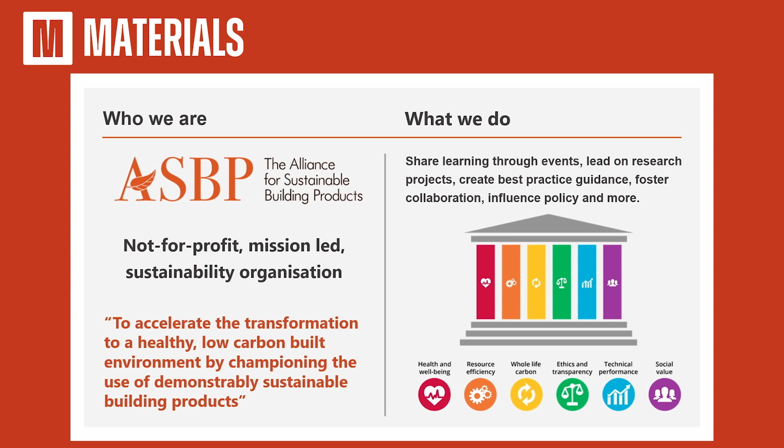So who are we? The Alliance for Sustainable Building Products. We've been around for, I think, 13, 14 years now. Our stand is over there if you want to come and say hello to us after the event. We're a not-for-profit, mission-led sustainability organisation, and we work around all these different areas. So today, very much, we're in the resource efficiency area, but that also touches upon lots of other areas as well. Reuse in terms of whole life carbon, ethics, transparency, making sure that we know what we're using is suitable. And we're very much about the products, and we're here to accelerate and really do more in terms of a healthy, low carbon built environment.

This is us in numbers. There's loads of info on our website, so if you haven't ever been on our website, do go and have a look. Lots of that available for free. We have toolkits looking at steel reuse, looking at reducing plastic packaging on construction sites. We have work on mass timber insurance, which is looking more at insurance related to fire and water damage of timber. So there's quite a breadth of what we do. We also have a lot of information on natural fibre insulation. All the manufacturers of that are members.

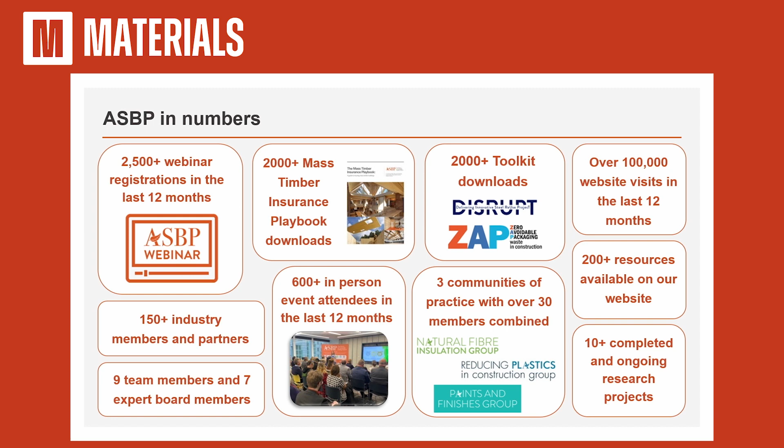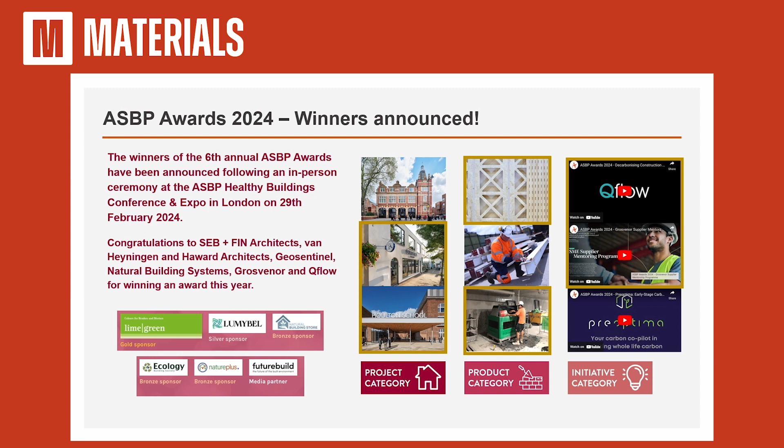Lots of webinars, and we had our Healthy Buildings event last week. This is our annual event, with probably about 170 people attending in the Building Centre. And at that, we announced our awards. This is our 6th year of our awards. And behind me, if you want to have a look, you can see all the finalists and the award winners there. So we had categories for project, product, and initiative. So go and have a look. Some really great projects, initiatives there.

We do run a lot of events on different topics. We're very much a knowledge-sharing organisation, so you can see some of the upcoming events there. If any of you happen to be near Wolverhampton or the West Midlands on the 13th of March, do come along, because we're having an in-person event, really picking up some of the stuff that we're going to talk about today, looking at how we work with the demolition industry to get much higher levels of reuse for different materials.

We have a memorial webinar from Neil May, who sadly passed away a few years ago. This issue is so important, mould, damp and health inequalities, so do come along for that. That's online if you can. And then we're looking at doing a few events related to biogenic carbon and circularity. It may need a snappier title than that, but that's how they're looked at in terms of the life cycle assessment standards.

And do come along, get involved with us. We're a friendly bunch. We're always doing lots of interesting things with lots of our members, of the about 150 members. Some of that's research, our specialist working groups in paints, plastics, insulation, lots of free stuff as well.

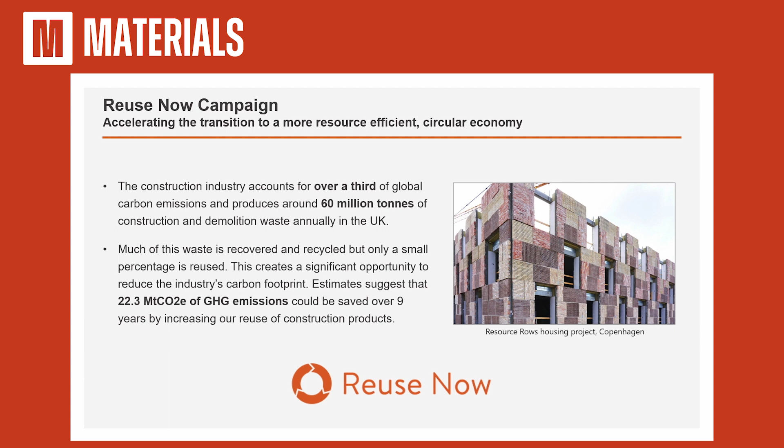Just one example of a case study here, you're perhaps already aware of the Resource Rows housing project in Copenhagen, where they innovatively didn't look at using bricks individually, but actually cut brick panels from the nearby Carlsberg Brewery building.

A bit more stats here from the Ellen MacArthur Foundation publication, looking at 3 main circular economy strategies that directly address emissions: making better use of existing buildings, designing new buildings better, but particularly from today's agenda perspective, reusing and recycling building materials so they don't end up in landfill or incineration.

And again, a few more stats. These strategies could reduce global CO2 emissions by 2.1 billion tonnes by 2050, making circular strategies vital to reaching net zero.

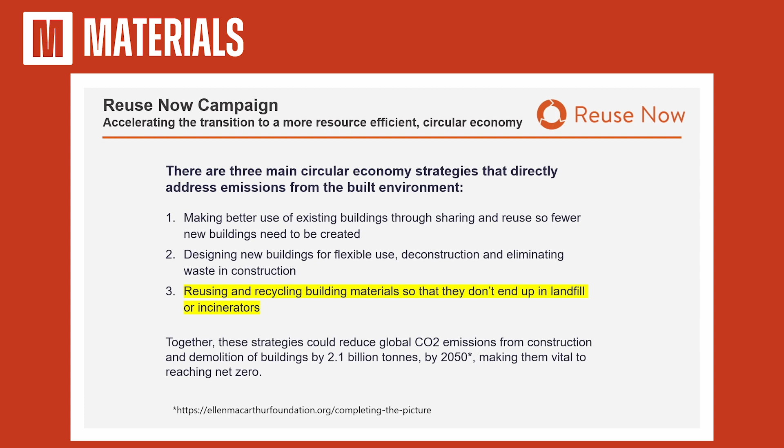Good waste hierarchy, inverted pyramid there, again something I'm sure you're probably already aware of. Looking again at that middle piece, building clever, reusing materials, designing for deconstruction and reuse.

Overall, circular economy and reuse strategies, as we've mentioned, reduce carbon emissions, maximise resources, addressing resource scarcity issues, which potentially are going to become more prevalent into the future. Limiting the impact of price volatility, not always, but quite often bringing cost savings, and increasing resilience by keeping those materials within the UK or within your local region. It's increasing resilience in the supply chain.

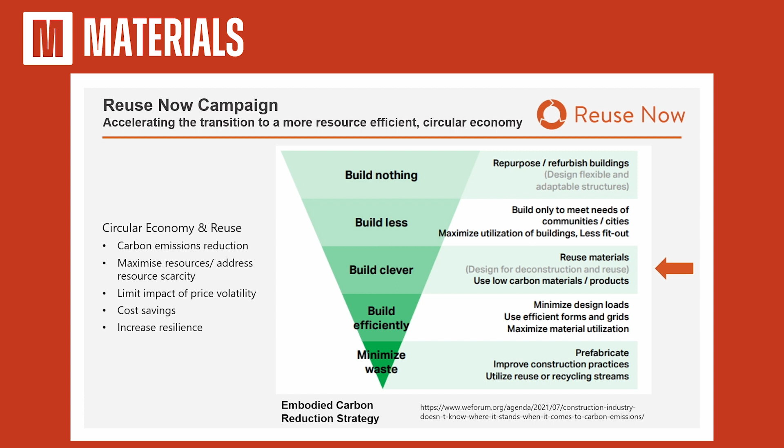Looking particularly at the Reuse Now campaign, which was relaunched in October last year with our Reuse Summit, which we'll look at doing again in October this year. We aim to encourage the greater reuse of building materials within the construction industry and accelerate the transition towards a more resource-efficient, low-carbon circular economy, as well as encouraging growth of low-zero carbon industries and supply chain models.

A nice long mission statement there. But really, within what we're doing with the ASBP campaign is being as practical as possible. We're very keen on knowledge sharing throughout the industry, and not just avoiding reinventing the wheel, to look at what others are already doing.

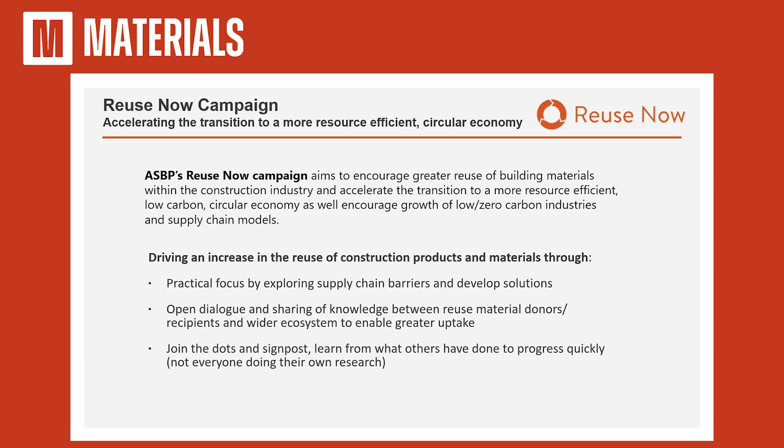There's lots of already good work happening around circular economy and reuse, so gathering that information, signposting to it, and there's lots of information, as Catherine mentioned, on the website, lots of different links, but then also looking at what everybody else is doing and seeing what gaps there are that we as ASBP can work with both of our members and the wider construction industry to plug.

So particular areas, in addition to events and what we've got on the website, looking at case studies, blogging on particular areas that we have knowledge of, or working with others to get their expertise across, doing some stakeholder mapping, but also doing some deep dives.

We've done quite a bit of research around different product and sector areas that the industry is interested in finding out more about. One of them we're starting to look at the moment is partitions within a building.

Another one is the industrial sector, because a lot of the case studies that we're coming across around reclamation and reuse of products tends to be in the commercial sector. So looking at the industrial sector, particularly in driving forward any best practice that's happening there and supporting the industry to do more.

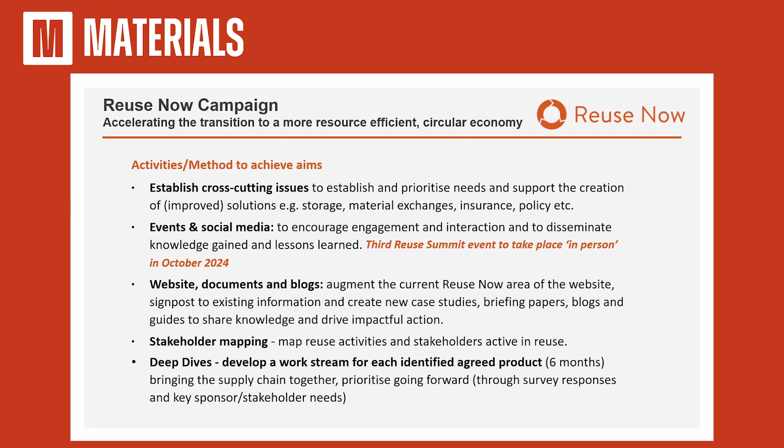And then also potentially, one of Catherine's favourites is doors. Not even particularly issues around fire doors, but just doors in general, and looking at what we can do to support the industry in reusing those.

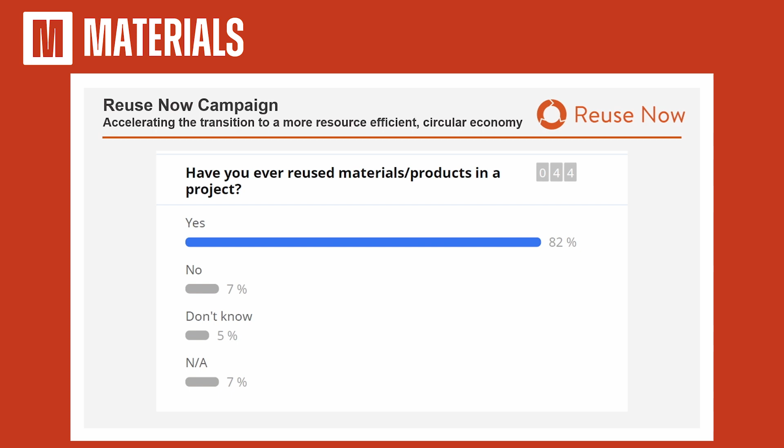Just a couple of stats that came out of our Reuse Now campaign. We did a few Slido questions at the event, and kind of as you'd expect, we are preaching to the converted slightly with the people that attend our events, but a good 82% of the audience had reused materials and products, and we then asked them to list the different types of products that they had reused.

As you'd expect, a lot of steel in there, some bricks, flooring, ceilings, paving, but also interestingly some MEP, which is another area that we're potentially going to look at moving forward.

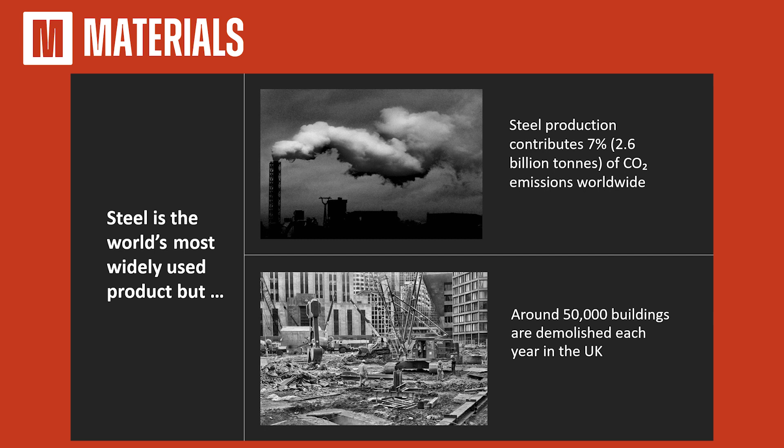Structural steel sections, so beams and columns, these are robust elements, and their properties don't deteriorate over time unless exposed to severe conditions like fire, earthquakes, or excessive dynamic loads. But generally, structural steel sections can be reused - they can be recovered from buildings and used within new buildings.

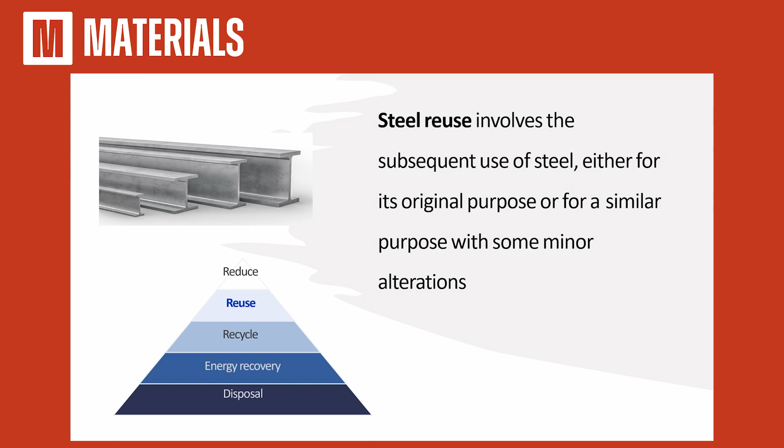Reuse is subsequent use of steel with some minor alterations, so reuse is different from recycling. Recycling is when steel is remelted, and remelting is a high energy process with lots of carbon emissions - reuse avoids that. Reuse provides up to 96% of embodied carbon savings, and that's why we see lots of interest from companies, with some construction projects using reclaimed steel, reused steel, because of this huge carbon saving.

Now, if well managed, steel reuse on projects can provide cost savings. There are lots of nuances to this, because recovered steel from buildings can be purchased at 20% lower price than new steel. But there are some additional processes of certification, testing, maybe some additional time for design, building, and fabricating. But we see lots of construction projects that are cost neutral, so there's no additional cost for reusing steel, and some even provide cost savings.

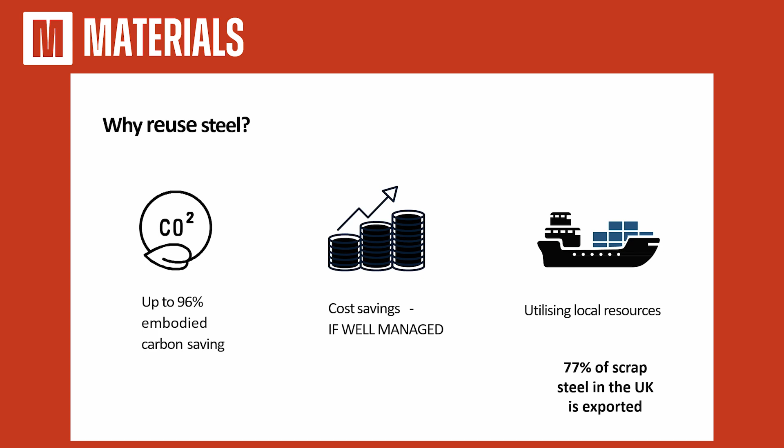And very importantly, reusing steel allows utilizing a local resource - steel that is available from buildings here in the UK. 77% of scrap steel is exported from the UK and recycled somewhere else overseas, so it's quite a long journey - Egypt, Turkey, Bangladesh, and some other countries. It doesn't travel nearby, so there's lots of carbon emissions. So there are socio-economic benefits of reusing steel - it's generating employment and using a local resource.

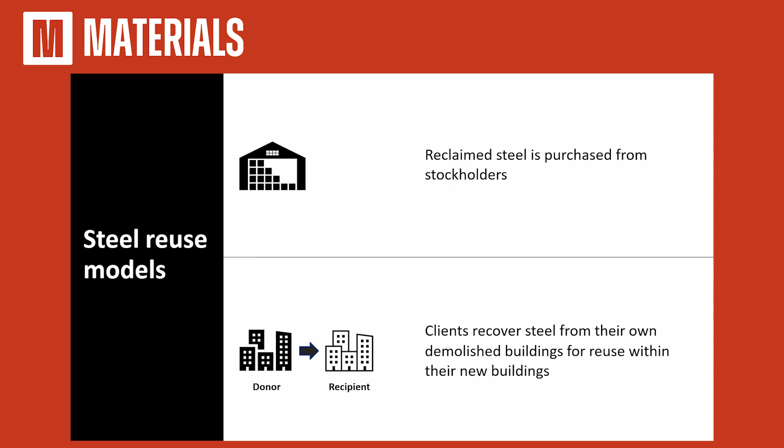So currently we see there are two major steel reuse models. Steel is purchased from steel stockholders who would previously have purchased it from demolition companies, and then it's sold on the open market. And there's another model where developers recover steel from their own buildings and then reuse it within their new developments.

So after the steel sections are recovered from buildings, the initial reconditioning takes place. This involves removing all the paints and coatings, because these cannot be used in the new life - they need to go so new coatings can be applied. It can also involve filling up holes, removing attachments, and similar processes.

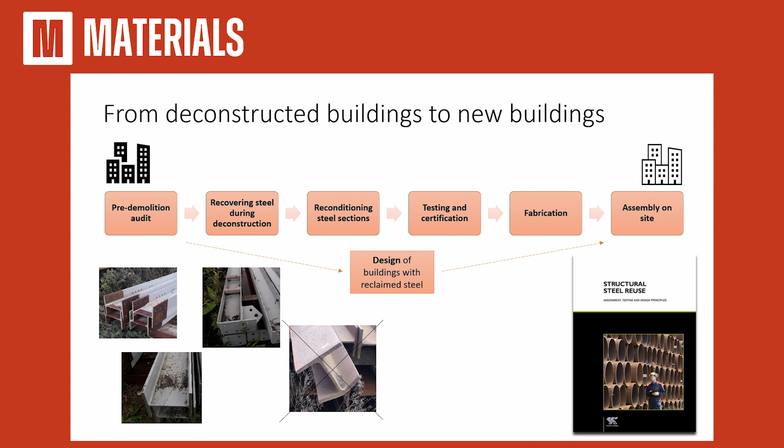And the technical barriers have been overcome for steel reuse, with the introduction of this structural steel reuse protocol by SCI. So there's no technical reason for steel sections not to be reused.

We looked at the lessons learned, what went well, what didn't go well, and the motivations for steel reuse - the huge carbon benefits of reusing steel is a big driver. Please have a look, these case studies are all available on our website. Bear in mind that project, Disrupt 1, was completed a year ago.

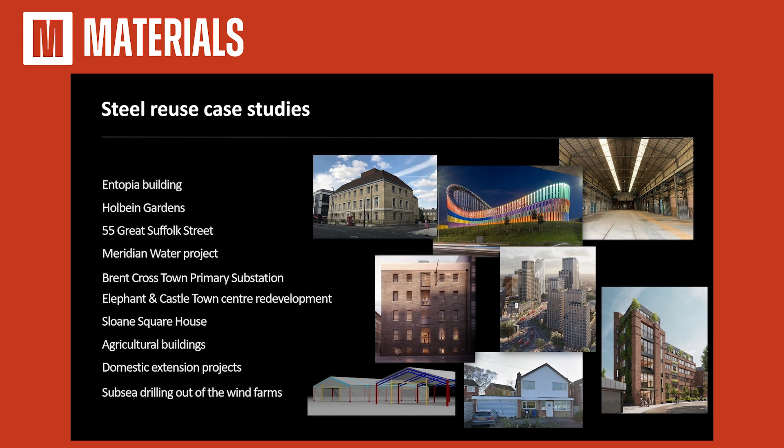So we have even more projects with steel reuse now in London, and these are some more findings from our project. Within this project we conducted interviews with the entire supply chain stakeholders - demolition contractors, stockholders, designers, clients - and identified the main technical, supply chain, economic, and other carbon considerations. All of these findings are available on our website.

There is a QR code, you can have a look, but there are lots of findings. We also mapped the supply chains - who is responsible for what, and what are the linkages. We also developed estimates of the amounts of steel that is currently reused and that can be reused in future. So there are lots of resources.

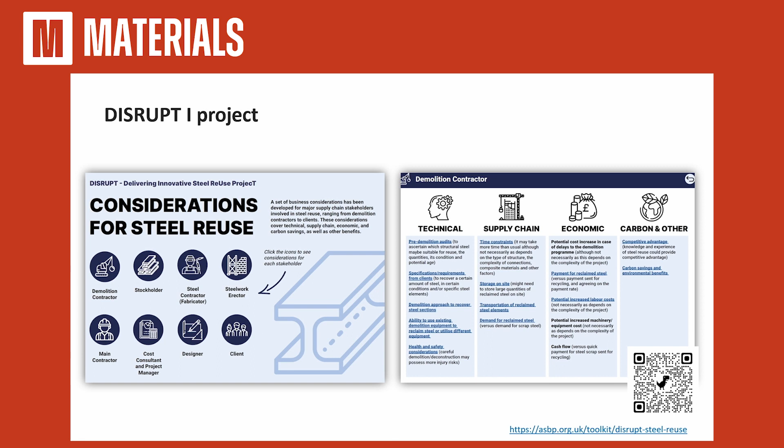Within this Disrupt One project, the main barrier for reusing steel is that there's lots of demand for recovered steel, which is great, but there's not enough supply. So basically, we need to recover more steel from buildings, and that's what we're doing now within this new project.

It's called Disrupt 2 - it's a deep dive with the demolition industry. We're trying to encourage demolition contractors to send more steel for reuse rather than recycling. We are funded by Innovate UK, so all the findings will be publicly available. We're co-partnering with the Institute of Demolition Engineers and Cleveland Steel and Tubes.

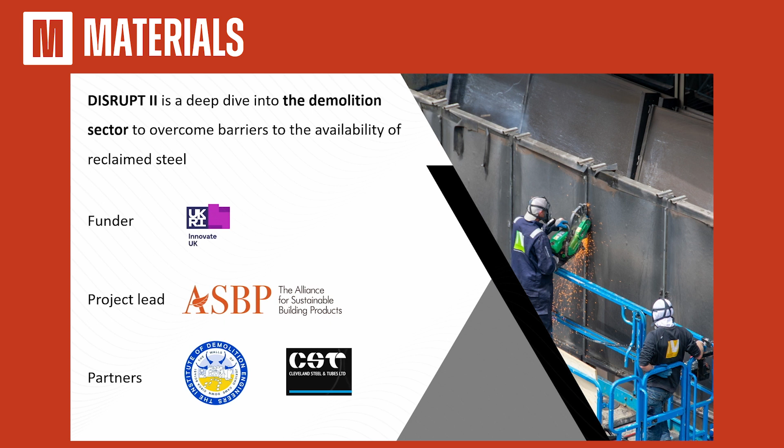So this project is a deep dive with the demolition industry. We conducted interviews with demolition contractors, and now we've formed a working group of 10 to 12 people, discussing in detail the technical considerations - the deconstruction and demolition approaches, how to recover steel from buildings in a way that's acceptable for reuse, along with supply chain, logistical factors, and economic considerations.

As part of this project, we are also looking at contractual relationships. Demolition contractors have contracts with main contractors or clients, and we're examining how this could be changed to encourage more reuse.

So far I have been talking about reuse of structural steel sections, but what about non-structural steel products? Fire doors, staircases, gates, fencing, all sorts of steel products that become available from demolition projects. Within this project we are looking at whether it's feasible to reuse them, what the barriers are, and how to encourage more of that.

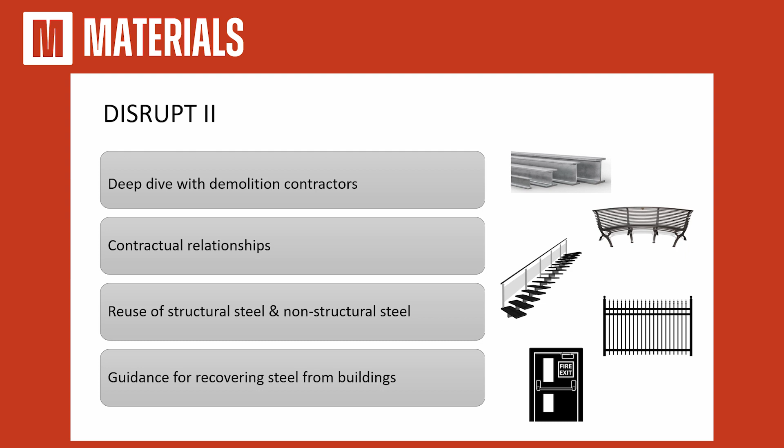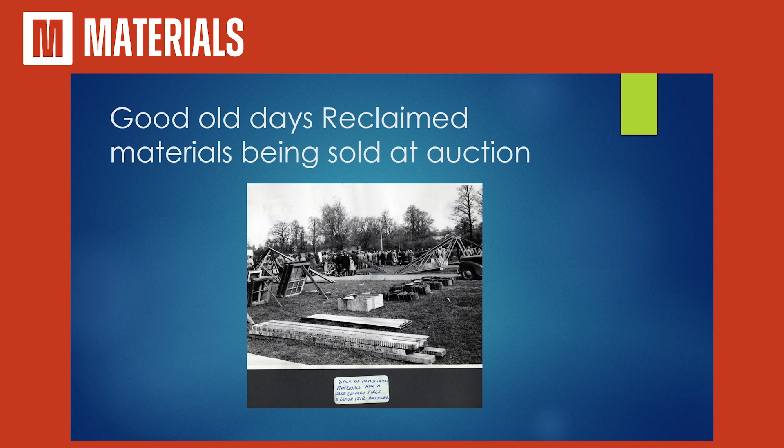But we do have, and we still have, difficult demolition waste, which is the main issue of my topic. This is a little photo here of how some of the timber used to be reclaimed. When I first started in the industry, 8 or 9 years old, my grandfather used to take me down to the yard, and we had to de-nail all of this timber so it could be sawn up. And it wasn't just modern nails, it was clout nails, where they used to use lath partitioning. Hundreds and hundreds of nails.

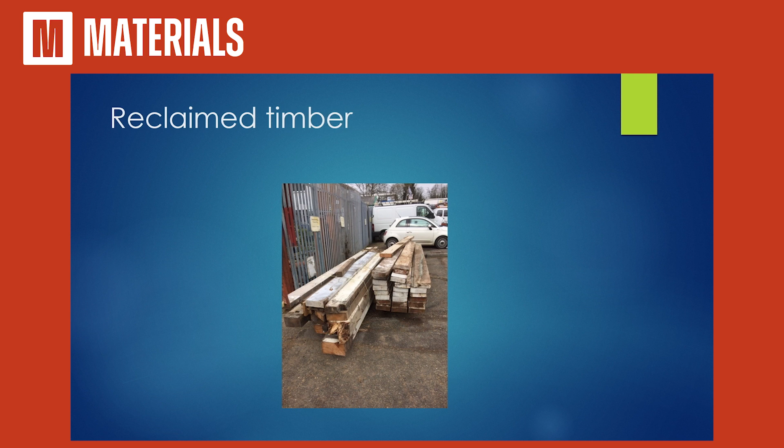We even used to recycle the nails, much to the disgust of the scrap man, because it used to give them punctures, but we used to put the nails into empty paint cans, seal them up, chuck them in the scrap. This is the timber, not some of mine, I must be honest with you, that's been de-nailed and then sawn to section sizes, predominantly planks for reuse in heritage reconstruction, etc.

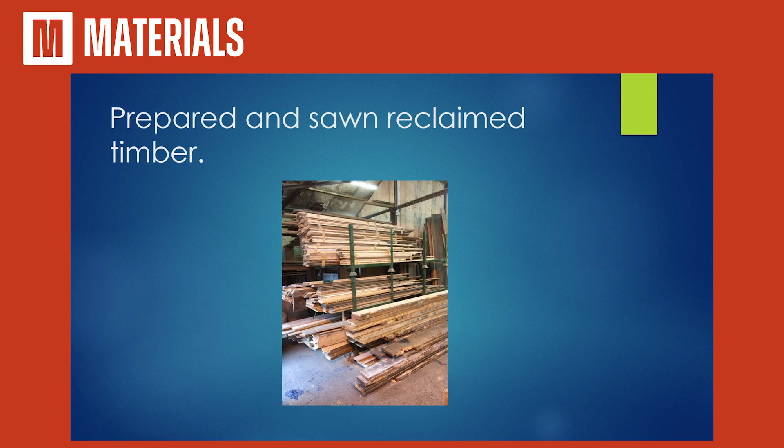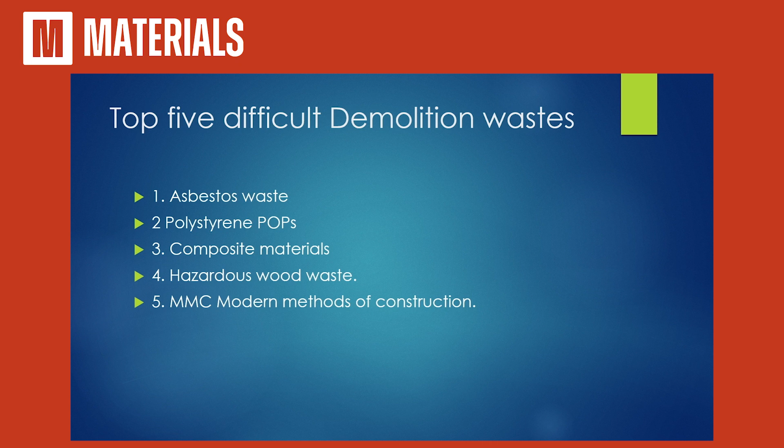So, our top 5 difficult demolition wastes. I've got asbestos waste, polystyrene and POPs, composite materials, hazardous wood waste, and then the last one is modern methods of construction. Asbestos, we've all known, has been a dangerous material. It was a brilliant material when it was first developed and imported into the country. Thousands and thousands of tons were brought into the UK because it was the best insulation material. Sadly, nobody thought to look at the side effects of asbestos. And asbestos is still one of the biggest killers in the construction industry.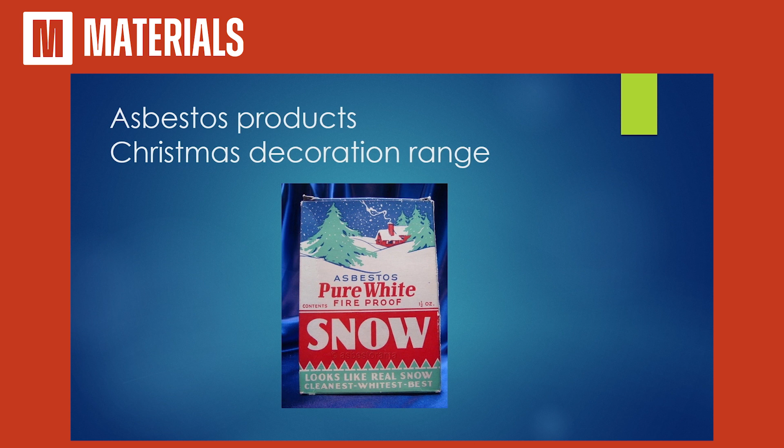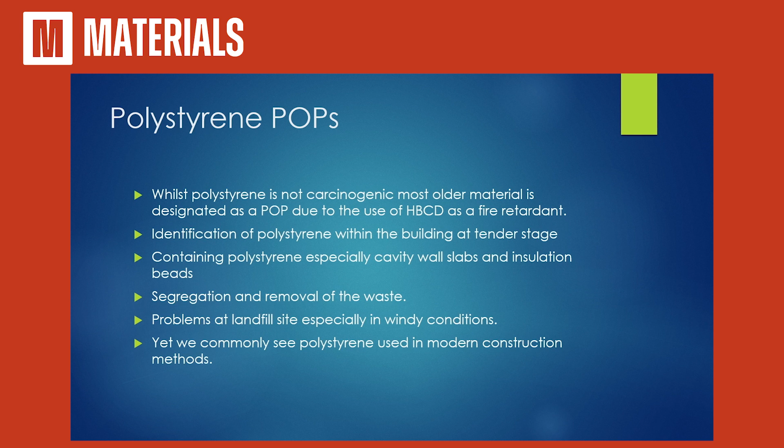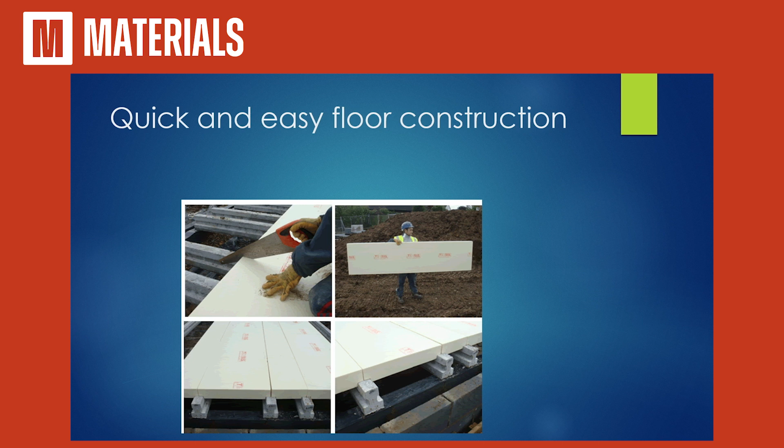So, next one is polystyrene and POPs. Whilst polystyrene is not carcinogenic, it is a real problem to our industry. It's in an awful lot of construction projects now. Sadly, I've had a wander around this morning and I've seen quite a few stands that are showing polystyrene blocks. I don't want to slag them off too much, but they're not really the best thing for our industry. The pre-insulated blocks here and the quick floor construction may be all well and good, but this is what happens when we try and get it out from a demolition project.

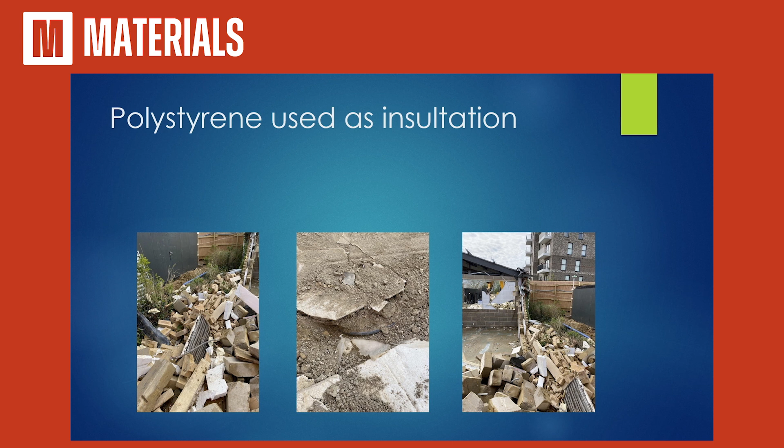Can you imagine insulation in a cavity wall? The machine driver comes along with his machine, knocks it all down, and there's polystyrene everywhere. This particular project, they picked the large pieces out by hand, but the smaller pieces they had to vacuum up with landscaping garden vacs. And that's quite common now. Even when it's vacuumed up and disposed of in the skip, there's nowhere that's recycling it in this state. Once it's in the rubble, it's contaminating the rubble. It can be taken out by flotation, but that is a little bit of a difficult process.

So we have pre-insulated plasterboard blocks as well. Some of the plasterboard has got phenolic foam backing. That is quite an issue. Plasterboard itself is regarded as a special waste. It has to be segregated. It has to go in a single non-reactive cell because of the hydrogen sulfide, the smelly rotten eggs gas it gives off, which is quite unpleasant. The Americans were the first to ban it, but it's now banned from landfill in the UK unless it is in a single cell, properly managed.

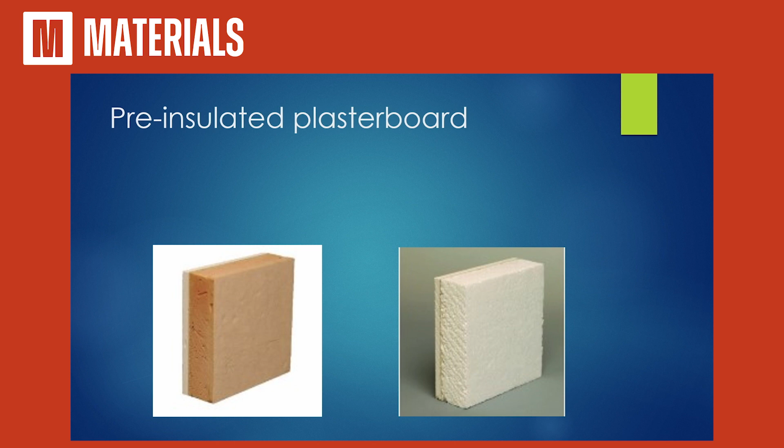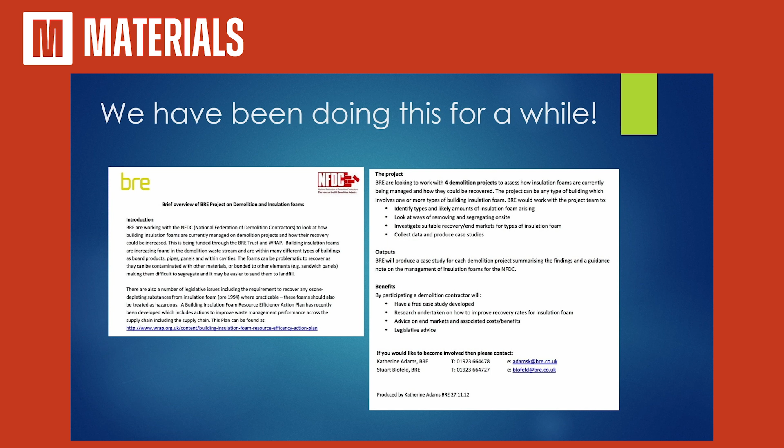But we have been looking at this polystyrene for quite a while. Katherine had one of these things pop up on Facebook. What's this, 11 years ago, wasn't it, Katherine, we first looked at this? The BRE actually had a building on the BRE campus that was constructed from polystyrene blocks with concrete poured in the middle. They had to scrape the polystyrene off by hand to get it away. And I'm not sure if there's still a stockpile there, but it's gone finally. So that's one I've never forgotten.

Composite materials. The use of composite materials is growing all of the time. Whilst we can manage those, and they are very good for what they're meant for, they give a beautiful finish to a product, but they are very difficult at the end of life. It's far simpler, say for a roof structure, rather than using a moulded panel. Some of these big sheds currently use a composite panel which has got a lining of steel sheets, phenolic foam, and then the outer layer for the roof, all stuck together.

The way they take those apart, they take the sheets off. They have to stand a machine on one end of it and peel the sheets apart to scrape off the polystyrene foam. There's nowhere other than fridge recycling waste that would take those sheets as a single product. They're not reusable. I've yet to find anybody that will take them as reuse.

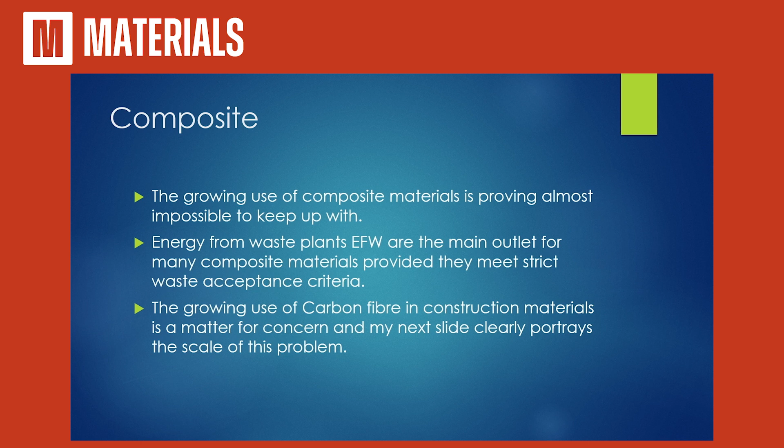Even back in the good old days when I was taking stuff for auction, the farmers wouldn't buy them because they sweated in the cow sheds and they used to drip water onto the cattle. They much preferred, believe it or not, asbestos sheets. But that market disappeared, unfortunately.

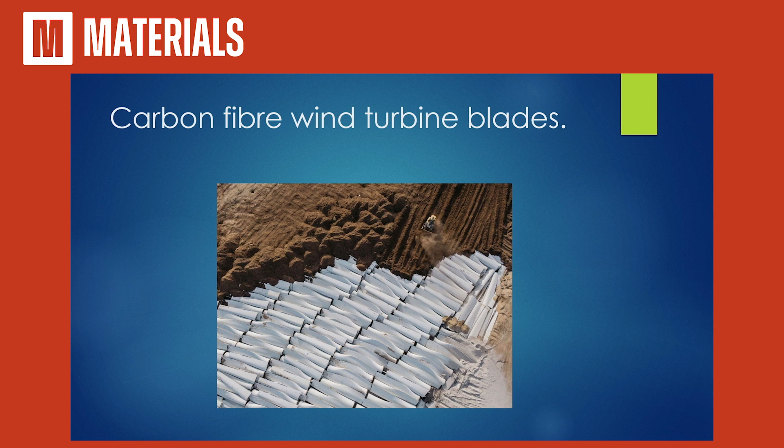Hazardous wood waste. The Environment Agency changed the position statement in 2023, and wood waste is declared as hazardous unless tested to prove otherwise. This is due to the various chemicals that they've used in the wood treatment to prevent fungal issues, damp issues, and as a fire retardant. So the hazardous wood waste now has to be taken for testing. If your test proves that it is hazardous, it has to go to a higher temperature incineration process.

There's nothing actually stopping it being reused as a length of wood. The chemical that's in the timber is not harmful to health by touching it; it would only really be hazardous if you burnt it at the wrong temperatures. So it's a problem that the NFDC have been working on very hard. When I was Chief Executive there, we took something like 300 samples to submit to the Environment Agency as a case, but unfortunately it wasn't quite enough for them.

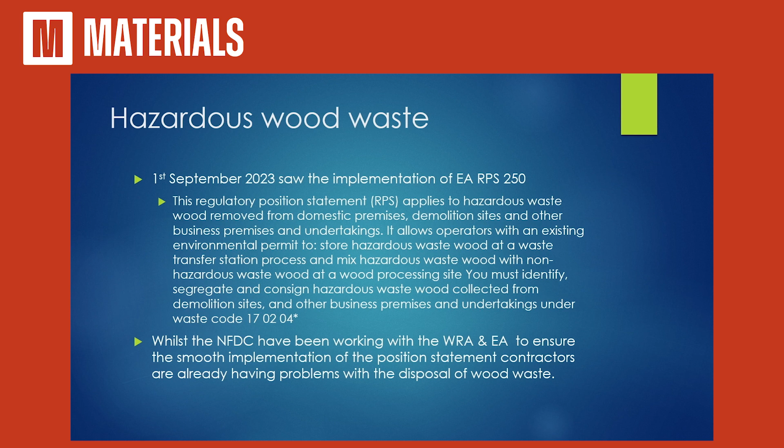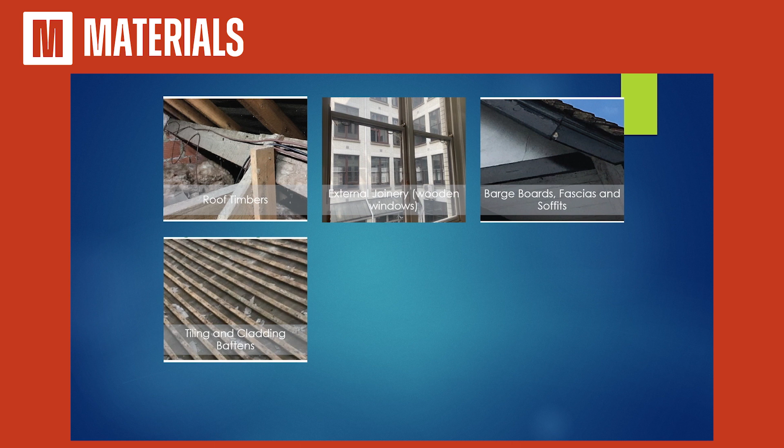The next one is a few examples of where we might see hazardous timber. It can be in the roof joists there, window frames and the barge boards, and tile battens. Tile battens actually have proven to be the most common area for the treatment, which is quite understandable. They're out in the elements and it would be the most likely place that they would be treated. This really puts an onus not just on the contractor but on the clients as well to ensure that the building is properly surveyed. And we would actively encourage pre-demolition audits to take full account of any materials that are in the building so that they can be properly and respectfully managed.

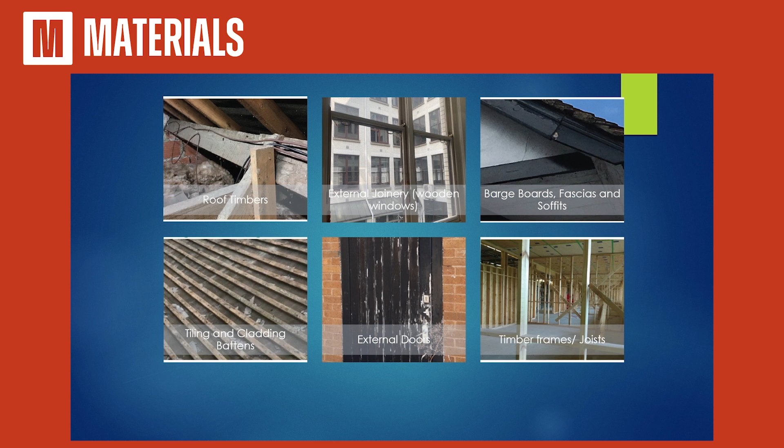Modern methods of construction. Robin Powell, dear friend of mine, the director of a large Midlands-based company, they took down a modern method of construction student accommodation block in preparation for the HS2 rail extension. I think you can see his comments there, and these are direct quotes from Robin. Virtually nothing was recycled. It was all composite materials. Their recycling rate was reduced by 30-odd%. So that's 30-odd% more to landfill.

They also lost serious amounts of money because they hadn't accounted for the actual loss and the difficulty in getting rid of the waste. So they were not really very amused. It's something we've got to consider. I'm not trying to condemn modern methods of construction, but let's think about the end of life. I've been a great advocate all of my career for an end of life building directive. I think it's time that all of us lobby government to make sure that the buildings that we put up in the future have got a sound and sustainable life.